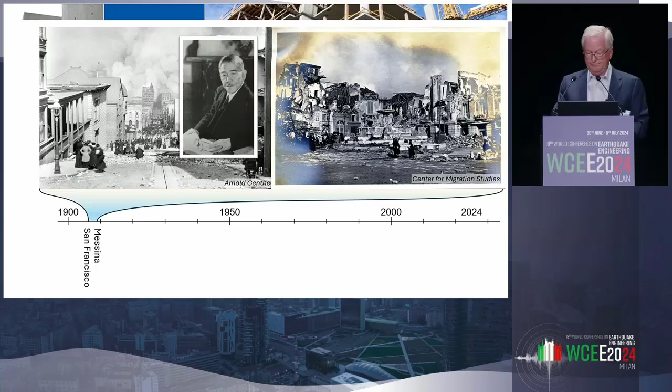It's practical, it's empirical, it's consistent with observations. That's how we do earthquake engineering today. The idea of designing for forces was very familiar. The idea of having load combinations that you could combine with other load effects was easy. And the fact that it was inconsistent with the idea that earthquakes don't apply forces, they shake the base of a building, that inconsistency could be overlooked given the practicality of the overall method. And so it was, largely, for many, many years.

Now, there were rapid advancements in the next quarter century. I point out a couple individuals from Caltech: a dapper-looking 26-year-old Professor Biot, and a little bit older George Housner, who did seminal work on development of the response spectrum method. Given recordings from earthquakes that occurred in the 1930s and the 1940s that were measured in the United States, it became quite clear that the idea of a base acceleration times the weight of the structure wasn't really the truth about dynamic response, that there was in fact amplification that occurred in various period ranges.

This set out decades of research and study, and quite frankly, a lot of arm waving about what exactly is going on in earthquake response. We can design structures for 1/10 of their weight, and yet they perform under rather intense motions where there's amplified response because of the response amplification we know from early work. What's going on? We see results of this: notions of overstrength, notions of nonlinear response. The idea of ductility comes into the language of earthquake-resistant design.

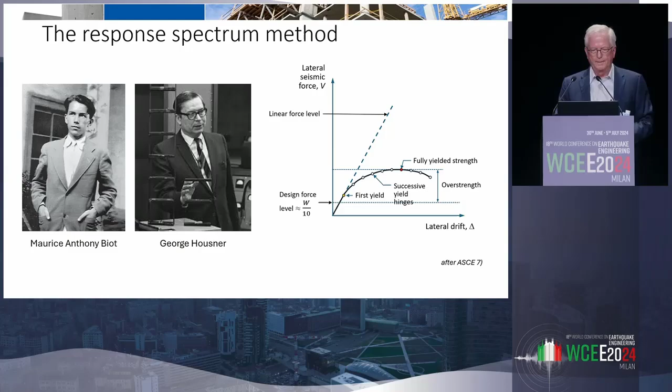We see that everywhere in our research and literature today, going back nearly 100 years now. Bringing this forward to today, at a World Conference on Earthquake Engineering, we started these conferences in 1956. The First World Conference was held at Berkeley, and there has been a conference every 4 years since. Throughout that period, this notion that the base shear could be around 1/10 of the weight of a structure for success has persevered as perhaps one of the longest lasting, most persistent ideas in earthquake engineering. But less and less so as we learn more about the subject.

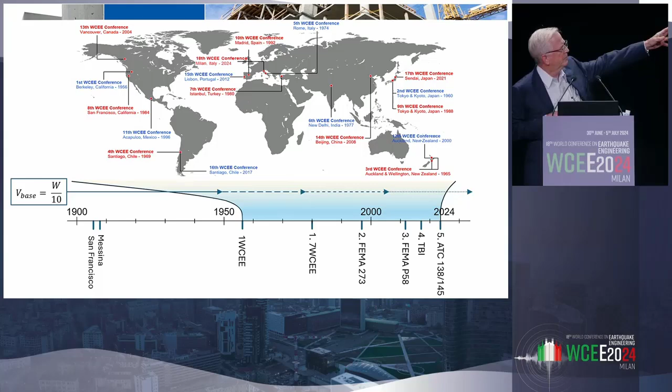Now, some interesting coincidences: 1956 was the year I was born, and the first earthquake conference happened to be in Berkeley. I wasn't there then, but among the 5 easy pieces I want to talk about, the first occurs in 1980, the year I arrived at UC Berkeley, during the 7th World Conference on Earthquake Engineering. The other 5 pieces are listed here with brief titles so I can identify the activities going on related to those things. In that 5-decade period, there are these 5 pieces I want to talk about.

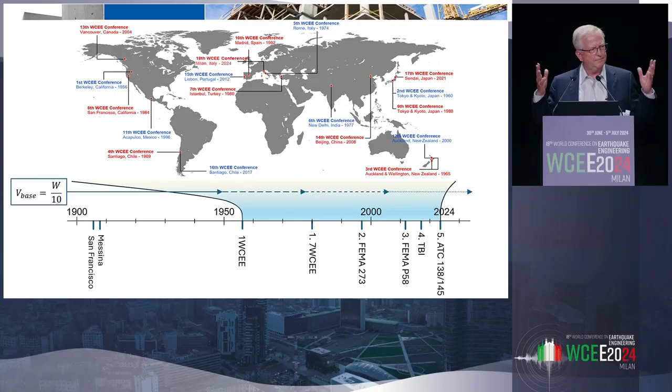Let's start on the first one. The first piece I want to talk about is displacement-based design. The paper was presented by Mete Sozen at the 7th World Conference on Earthquake Engineering, 1980. You can see a picture of the first sheet of that paper. It was titled 'Review of Earthquake Response of Reinforced Concrete Buildings with a View to Displacement Control,' or drift control, actually, as he wrote.

Pictured on the right is a photograph of a test structure on a shaking table. Professor Sozen is the handsome fellow in the middle. The fellow just to his right is the scruffy person - that's me as a graduate student. We were standing on the shaking table for a publicity purpose, to get a photograph showing what it was we were testing, what we were doing. That test model was being pulled toward the right by a cable up at the top.

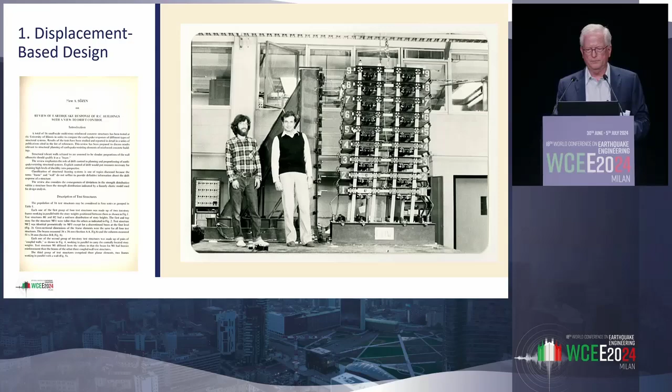We were looking at the static response of the system under rather large forces. Eventually, one of these versions collapsed onto the table - they were different times, we were a little less concerned about risk on these tables. The shaking table was 12 feet square, or a little over 3 meters square. It moved only in one horizontal direction. It was very limited, but it became the workhorse for Professor Sozen and the way he started thinking about displacement-based design.

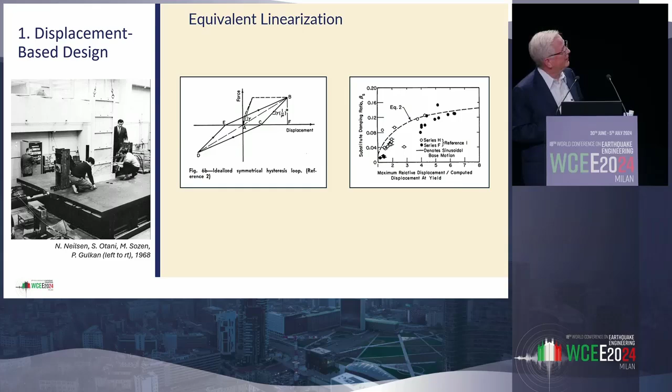Eventually, they flipped the method around. They started thinking about this in a somewhat different way. And this came out in a paper in 1973 at a workshop held by the National Science Foundation. In this paper, Sozen writes about a different approach to the earthquake-resistant design of reinforced concrete structures.

In this paper, he flips the idea. Rather than using the structure and the equivalent linearized properties to estimate demand, he says, let's flip this. Let's first assume there's a tolerable displacement expressed as a multiple of the yield displacement, and you pick that displacement based on how much damage you think is acceptable. So you start with the idea that you want to control the damage, you pick the displacement.

Determine a reduced stiffness of the frame, step 2, find a period, find an equivalent or substitute damping based on what was shown in the previous slide that Gulkan had been working on, enter a linear response spectrum with the period and the damping, and get a base shear out of it. And he tried various schemes of this type.

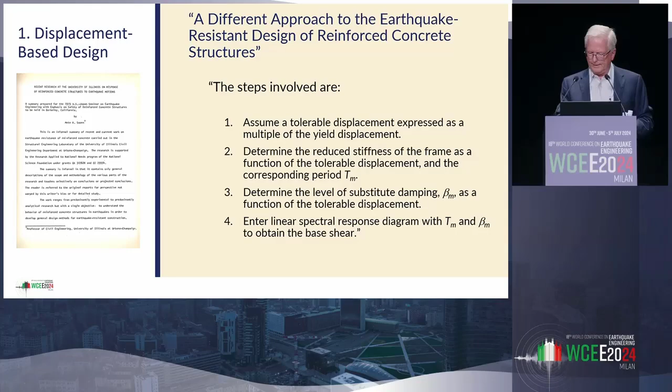This eventually came out, being published as work that Professor Gulkan and Sozen had in papers in ACI Structural Journal. It entered into the thinking about a substitute structure design method. In effect, this is really the direct displacement design method. Not quite the same as it might be done today, but the idea of starting with the tolerable damage and working backwards to figure out what the structure should be was a huge insight, a very different way of thinking about this problem at the time. I think it has to be attributed almost entirely to Sozen.

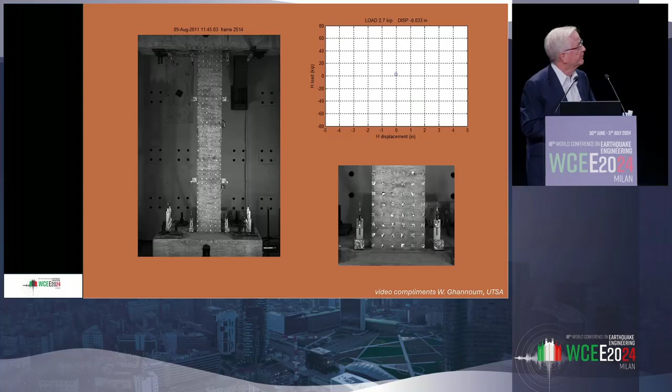Now, why was Sozen interested in displacement as opposed to forces? What we had before was, well, you get a base shear, 1/10, 1/12 of the weight of the structure, or something more complicated than that. Sozen's interest really came out of his experience in earthquake reconnaissance, looking at damage, and his experience in the laboratory looking at how damage develops in structures as they're moved.

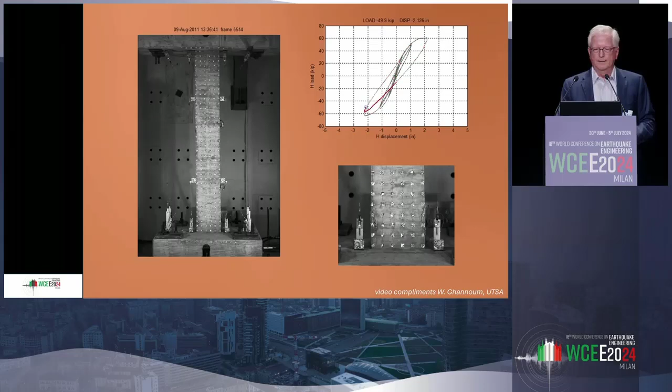And watch this video if I can get it to run. There it goes. So this is a column subjected to axial force and cyclic lateral loading, effectively linear at this point, cracking, beginning to yield soon. There we go. We'll let this run a moment more. Much more extensive yielding. The force resistance of this structure, or this simple column, is determined by the longitudinal reinforcement.

The longitudinal reinforcement in the column establishes the moment strength. Provided the structure doesn't fail in shear or bond or anchorage, and provided it's pushed into the nonlinear range, the shear force that it's going to develop is determined by the moment capacity. And there it is. And it's not that shear force that fails the column.

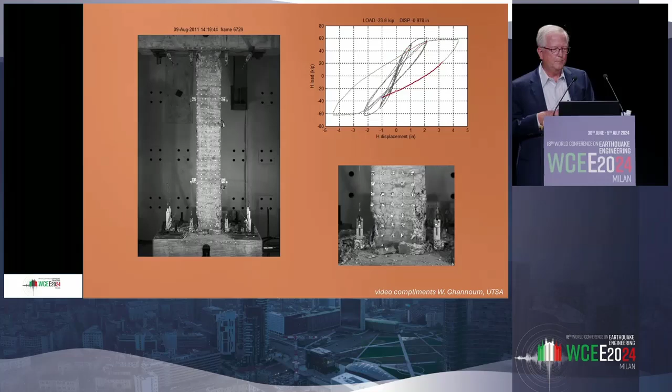What fails the column is the deformation and the repetition of large displacement cycles that cause damage and that eventually lead to the failure. And Sozen's interest initially was primarily in the structure, I believe, and trying to establish how to control displacement, to control structural damage.

He was also, though, interested later on in the non-structural parts. How do you control non-structural damage by controlling displacement? And it was a very different way of thinking about things at the time.

Now, I don't want to get into detail on the subject, but drift and displacement have been a subject of our codes and our guidelines for many, many years. Sozen sometimes liked to point to this edition or earlier editions of the Structural Engineers Association of California's Blue Book. And there was an appendix there by a drift committee that had written its report in 1959.

And the drift committee, if I can find my notes here, said that safety, of course, was important when considering drift. So if you had elements that would get knocked out of place and fall on people and kill them, those had to be addressed. But beyond that, non-structural items and discomfort of occupants were not to be part of a building code because they demonstrated excessive paternalism.

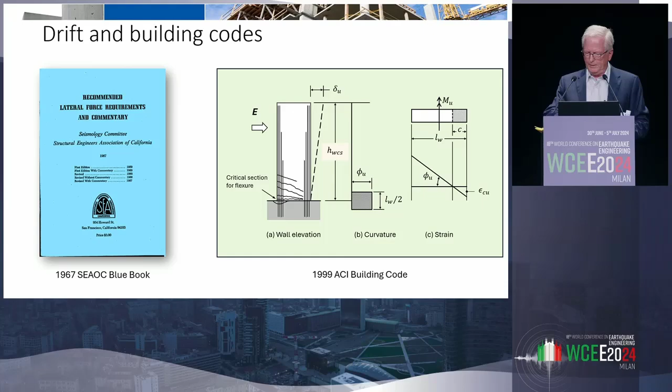I want to close on this first piece, and I could spend all day on it, and I might if I don't stop now. But Sozen had a big team of students over many years, and I credit that team as shifting the focus from forces into displacements as a preferred means of identifying damage and design requirements.

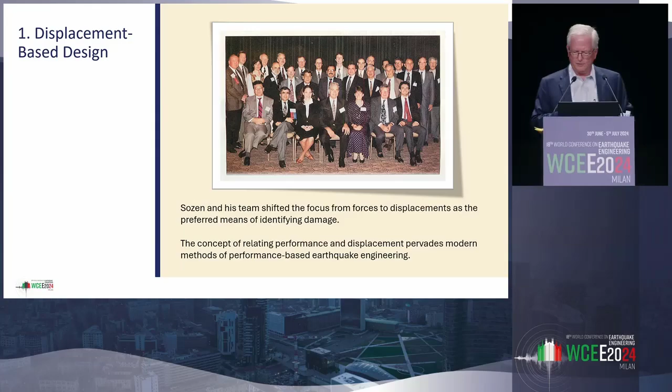And the concept of relating performance and displacement, and the notion of picking the displacement as a way of deciding if a design is good or not, or what needs to be done with it, today pervades methods of performance-based earthquake engineering. And while Mete Sozen tended to disparage the notion of performance-based engineering every time I spoke with him, he really, I think, got the start of performance-based engineering, gets the credit in my book of getting us moving there. So that sets the stage that I wanted to start with.

The second thing I wanted to say about performance-based earthquake engineering, the second of the 5 easy pieces, is one related to existing buildings and the assessment of those buildings.

I wanted to point out first that in California, in the period of 1971 to 1994, there were many damaging earthquakes. There was a lot of shaking going on in California at that time. And those of you who are from California and young, get ready. It'll start up again sometime soon.

Be prepared. But this was a very active period. We learned from those earthquakes that most modern buildings perform reasonably well. They did what they were expected to do. They were pretty safe. But many of them sustained damage that was not adequately controlled, mainly in non-structural systems. So that was a consideration that needed more attention.

The existing building stock, on the other hand, was another story. And there was a lot of damage that occurred in existing buildings at the time. Owners began to be more aware of the problem of existing buildings. Many owners contacted engineers to look at buildings and start thinking about strengthening them. The word was strengthening at the time.

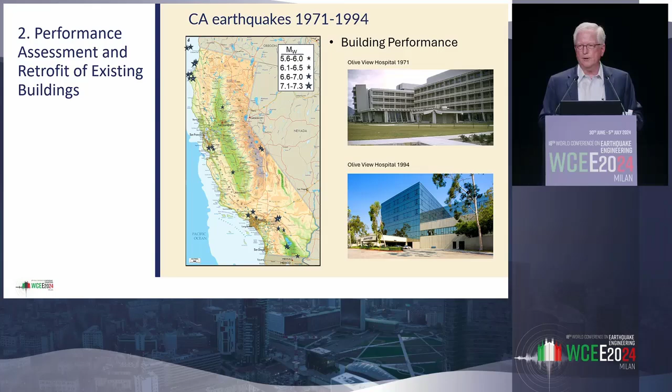And when they got into the business of negotiating fees on these things and the cost of construction, they started asking questions, well, exactly what am I getting for the money I'm going to put forward for this building? What kind of performance should I expect? And engineers were making up answers, in my opinion, doing their best job, but there was no standard to really judge this by. And performance-based earthquake engineering, I think, in California grew out of this many earthquakes and the need to answer the question, what kind of performance will I get if I retrofit a building and design for a higher performance level?

Given the work that Sozen had been doing and others, there was awareness in the structural engineering community on the west coast of the US that displacement mattered. The original idea of seismic strengthening was that if the strength was less than about three-quarters of what the modern building code required, you added more strength to get it up to that minimum level. The thinking was beginning to change around the early 1990s into thinking about displacement-based ways of controlling damage.

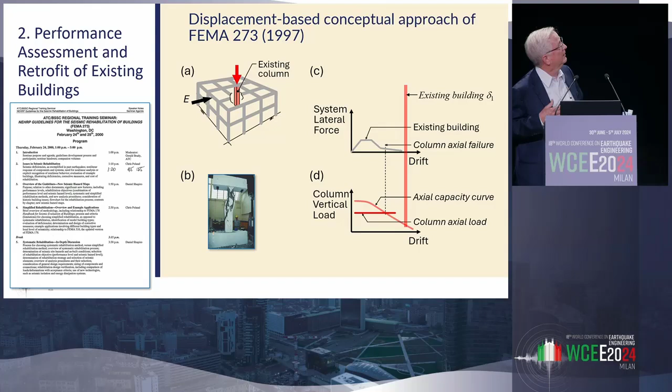Now, if you start with a simple frame like the one illustrated in A, and you've got this red-orange column in the middle that's vulnerable, one way to fix the structure if it's inadequate is you can jacket the column or replace it. If you want to change the structural system to protect that column, the old thinking was you strengthen the building. The new thinking was that you had to control the displacements in the building.

This little set of cartoons came from some seminars used to train practicing engineers on the new methods being developed, on guidelines for seismic retrofitting, which came a couple years later. But this is, I think, a useful slide for illustrating the concept.

We've got that vulnerable column. The lateral force resisting system is weak. It doesn't provide enough resistance to control displacements. In D, the column may be pushed beyond its shear capacity, or beyond a capacity where it can continue to support vertical loads. The key to retrofitting in providing a supplementary system is to bring the drift back.

And this seems routine today, but in 1991 or '92, this was not routine. This was not the usual way of thinking about retrofitting and repairing, rehabilitating buildings.

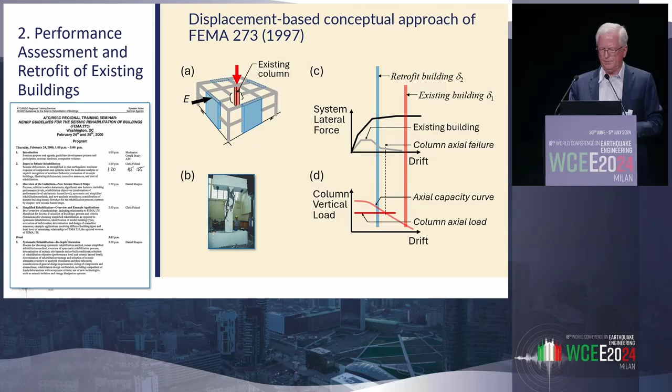FEMA, the Federal Emergency Management Agency, recognized the issues of existing buildings, and it started a program in the 1980s that really kicked off with the development of a document, FEMA 273, with a set of guidelines for the seismic retrofitting of existing buildings.

Here are some of the key team members involved in the project. Many of them I think of as real masters of earthquake engineering who deserve to be invited soon to this stage. Ron Hamburger, in one of the presentations early on in the project, presented this slide during a presentation at an East Coast university. This slide became really the poster child, in a sense, for the project, and it shows a number of interesting things.

One was the notion that there would be multiple performance objectives that one could choose. One could choose something related to a 25-year shaking level and a different performance level versus a 2,500-year return period, for which you might consider being on the verge of collapse. So this idea of performance objectives with both demand and performance level both considered was kind of new.

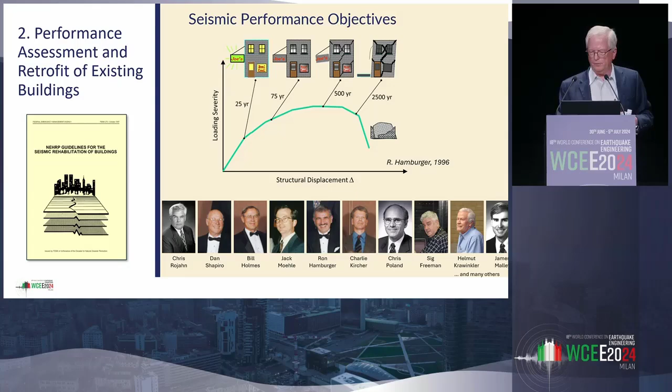The response is definitely non-linear, which was fairly new at the time. And the idea of being very visual in the presentation of these different objectives, so that you could explain to those property owners who wanted to know what they were getting when they asked the question — what am I getting for the amount of retrofitting you're proposing to give to me? It was very important to have all those things.

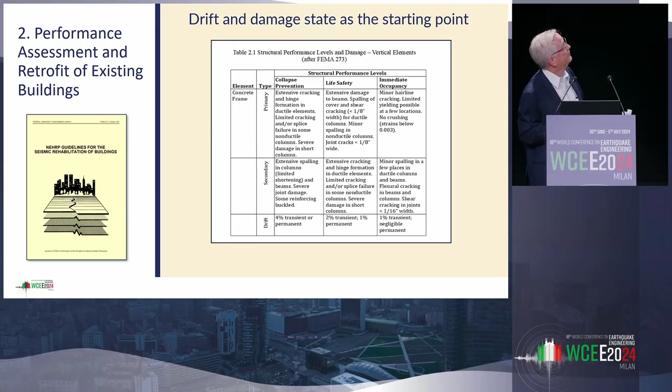I think for the first time, this committee went to work on trying to define what each of those limit states really was about. Shown here is part of one of the tables from the FEMA 273 document. For concrete frames, if they're a primary part of the lateral force resisting system — meaning they're supposed to resist the earthquake shaking primarily — for collapse prevention, life safety, et cetera, this is what that team decided was the right set of performance levels and how to describe them.

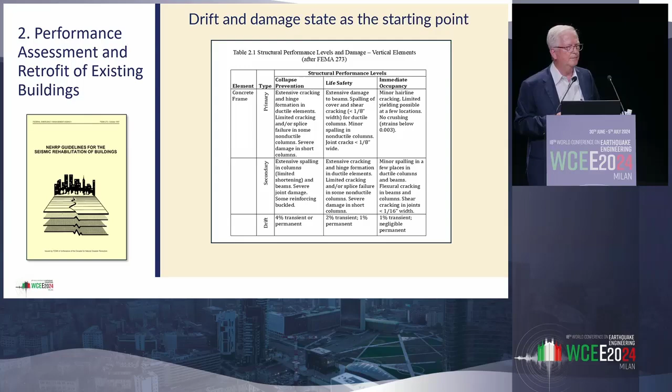Once the levels were described, the team had to go about the business of selecting ways of delivering a building that would do that. So there was discussion and provisions developed related to global modeling, how to do a global model. And for the first time in US practice at least, there was very explicit consideration not only of linear modeling, but non-linear modeling and analysis methods, both static and dynamic.

For each component type, there had to be models developed and described. You had to understand what were the deformation limits and the criteria that were needed. And then for each one of those components, criteria were needed to help define whether they were force controlled — in other words, unable to yield without failure — or deformation controlled, meaning they had the capacity to deform non-linearly without failing. For those different kinds of components, criteria were needed for strength, for stiffness, and something totally new for the time: how to define the deformation capacity of a component that's yielding. Totally new thing.

Not that we didn't know it was needed, but we didn't ever have criteria for that. I want to pause for a moment and reflect on the fact that this had a huge impact on practice, on research, and on computer software development. We needed software that could do this kind of work, and the software companies stepped up and delivered that.

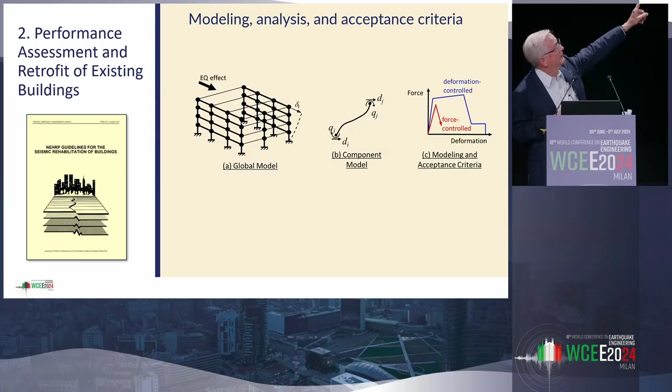We needed to understand criteria for deformation-controlled components, and we made a lot of them up at the time. But this provided a focus for research in the structural engineering community to do more tests where data were not available, and to create databases of test results from which to derive criteria for strength, deformation capacity, and so forth. It opened the door because engineers had to use these procedures. New results came, software came, research, and practicing engineers started doing nonlinear analysis for the first time on a somewhat routine basis, and it changed the way practice developed from that point forward in California.

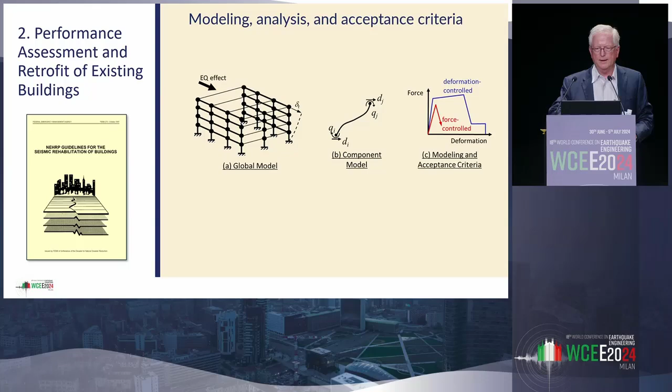These procedures were very widely used. The Berkeley campus is one example of sort of a retrofitting museum, so to speak. But we can find structures all over the United States that have been retrofitted by these procedures, and we think they've been very effective. One thing I didn't mention is that while we had performance objectives, they were really notional in the sense that we could state a life safety criterion, but we didn't actually calculate a risk of not achieving that criterion. That was just too much to do at the time, and more time and more research was needed to take that next step.

And that gets me to my third piece in the 5 easy pieces. So right about the end of the development of FEMA 273, it was apparent that we needed risk-based procedures. We know that there's uncertainty in earthquake ground motion, in structural response, in the occurrence of damage, in the amount of time it takes to fix damage, and so forth. But it was a huge undertaking to figure out how to do that.

We adopted Ron Hamburger's cartoon, updated the structure a little bit so we could call it our own in the Pacific Earthquake Engineering Research Center. Bill Holmes from Rutherford and Chekene came to one of our research meetings and gave a presentation and told us we needed a performance engine that would be able to calculate not just serviceability states and life safety states and so forth, but would be able to tell us the cost for repair, the casualty rates, and the downtime. We had no idea how to do it in the Earthquake Center, but we had really good people to work with.

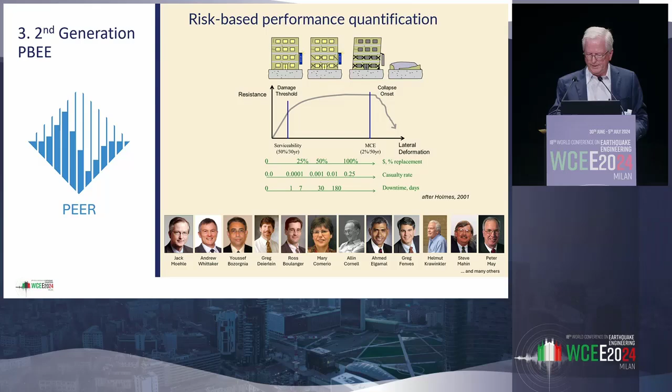For example, Helmut Krawinkler and Allin Cornell from Stanford University took on the task of trying to figure out how to formulate this notion of performance, how to actually do a calculation that put all the uncertainties together mathematically and enabled us to do a calculation of what was the risk of repair, of cost, et cetera. The way the equation worked, just in the boxes: given a facility and a location, do a hazard analysis, do a structural analysis, damage analysis, loss analysis, and then come out with some variables about cost and time and activities required to restore it.

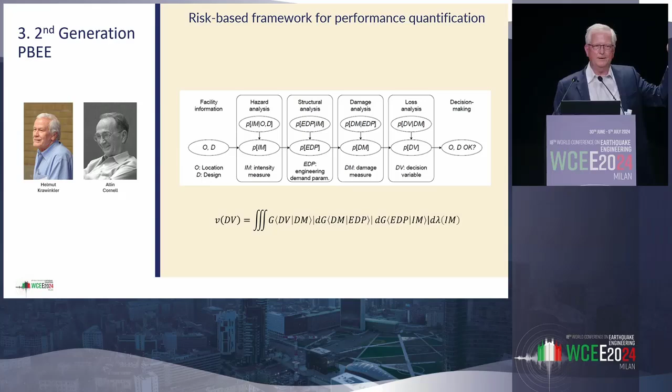Easy in the boxes. Even easier if you just write down a triple integral. This triple integral essentially incorporates the ideas in the flow chart above. Many practicing engineers looked at this and said, 'You've got to be kidding. No way are we going to do anything like that. You academics are nuts.' Peter May, who was a social scientist, looked at the equation and said, 'You're oversimplifying the problem.' And Peter was right. Solving the equation isn't easy, but we figured out ways to do it.

One of the ways it was solved was done in a little project with Tony Yang—I think Tony is here somewhere in the audience. We were working on trying to figure out a practical way to do the integrations and essentially set up a Monte Carlo scheme. The idea was that given a facility, you did a hazard analysis, you selected some ground motions to represent the hazard, you input them into the structural model, calculated engineering demand parameters like drift and acceleration. You determined damage from that using a fragility relationship—how does damage of an infill, for example, relate to story drift?

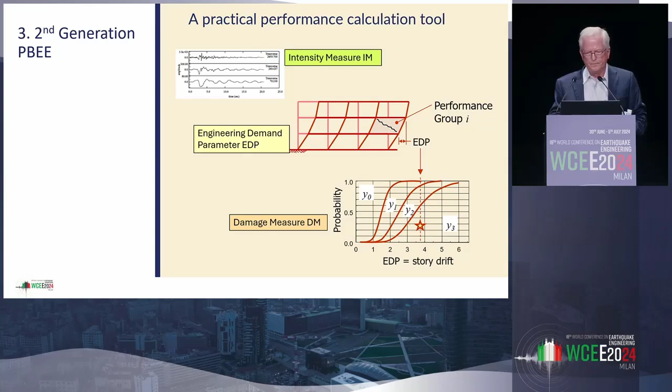You would then do this in a Monte Carlo study thousands of times so that you could characterize the distributions of the results. But there was no way you could do it, because just the nonlinear analysis at the time, and still today, takes too much computational time, and dealing with the results is just too difficult. So what we schemed was a technique where we did it a finite, smaller number of times, and collected all the engineering demand parameters that were of interest. In this example, we did a 3-story building.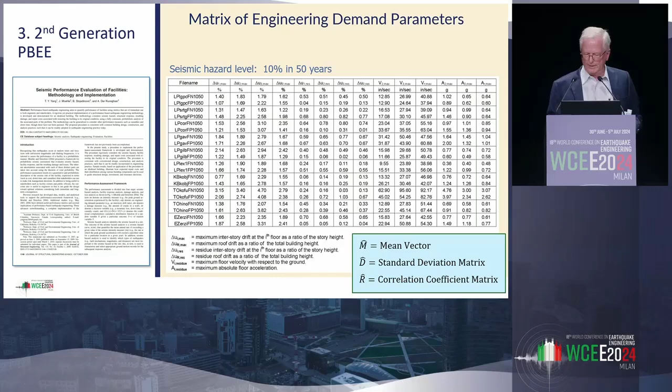We were interested in running 11 ground motions at each of several hazard levels. From that we collected displacements, accelerations, and base shears, then looked at that matrix to figure out the mean vector for each demand parameter, the standard deviation for each one, and what the correlation coefficient matrix looked like. So we could mathematically derive, through an inverse process, a series of demands that was statistically consistent with the results from the nonlinear dynamic analysis, allowing us to simulate mathematically the results from nonlinear response history analyses. Here's a sampling of 10 sample realizations using a process like this.

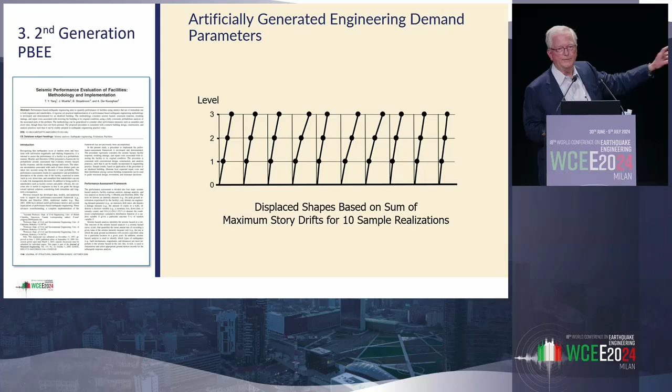The nonlinear analysis could take an hour per run. This took a fraction of a second to do 100 of them. So with something like this, we could develop realizations of what the earthquake demands were, and given those realizations, we could do damage calculations, loss calculations, etc., in a probabilistic way, taking all the uncertainties into account, and do it fast.

In this process, we could calculate the probability of certain repair costs given an input motion. So here are essentially fragility curves for cost. We could integrate those and get an annual rate of exceeding a total repair cost, and take an area underneath that to get a mean cumulative annual total repair cost for a building. Or you could look statistically at how individual components of the building were doing, find out which components were being more heavily damaged than others, and try to find ways of changing the structure or clearances to reduce the losses causing most of the cost. It was a fascinating exercise, fun to develop and get it to actually work.

This procedure was being developed by the Earthquake Center at the same time FEMA was involved in another project, the FEMA P58 project, which aimed to develop the data necessary to determine what the losses were for a building of any general type, with multiple building types being considered at the time. So there was a big team that worked on this, marvelous people to work with.

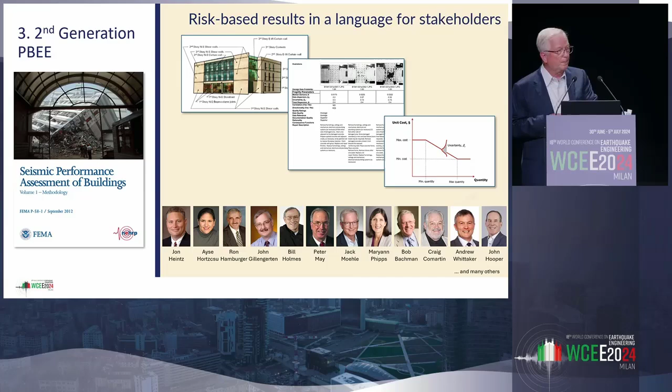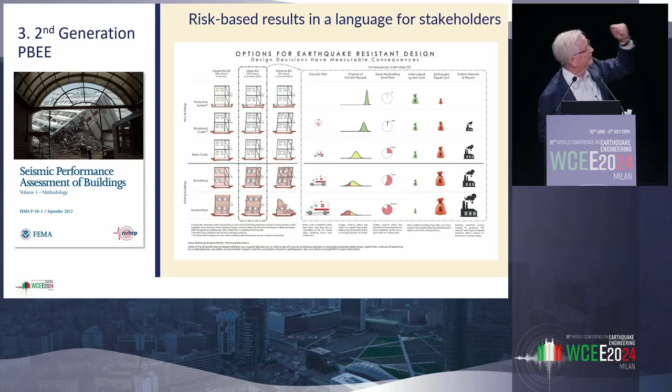When the information was all assembled with this performance calculation engine that we built at Bill Holmes's suggestion, you could put together almost anything on performance output. David Marr, who I saw earlier yesterday, maybe in the audience, came up with this graphic for the FEMA P58 project. The idea, on the vertical left axis, was having different design bases determine, as you move across, different casualty rates you might expect. It might influence downtime differently, the probabilities of getting a red, yellow, or green tag on your building, cost for repair, and downtime costs.

As we were getting toward the end of the project, FEMA said you've got to include environmental costs as well. Once you've got the engine and start inputting the data, creating fragility relations for everything you need, this becomes kind of routine. This was really, in my view, the third big piece in performance-based earthquake engineering: being able to quantify the risk of being in different damage levels.

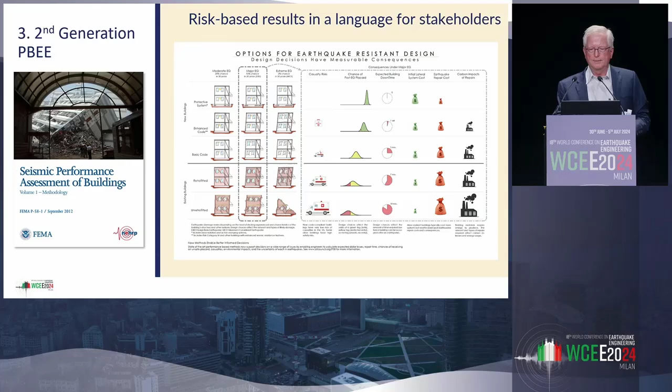Now, once we had things like this, we started working on the problem of designing tall buildings. There were many other types of buildings that could have been pursued, but there was particular interest in California and throughout the West Coast at the time in pursuing taller buildings that were a little different from buildings designed before. They were outside the requirements and restrictions of the code, so something different was needed.

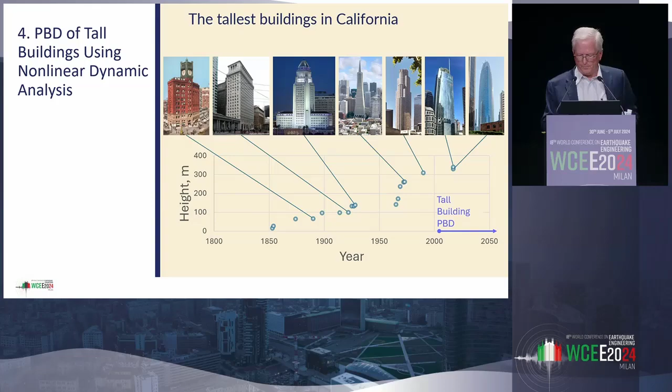Here is a plot of the tallest building in any given year in California up until about 2015. As we start getting into around the year 2000 to 2006, there was a bigger push coming along to design these buildings outside the prescription of the building code, and we had the tool to do it — this performance-based tool. The new building generation had different kinds of framing systems, odd geometries and cladding, and combinations of structural systems within the building that just didn't match anything within the building code.

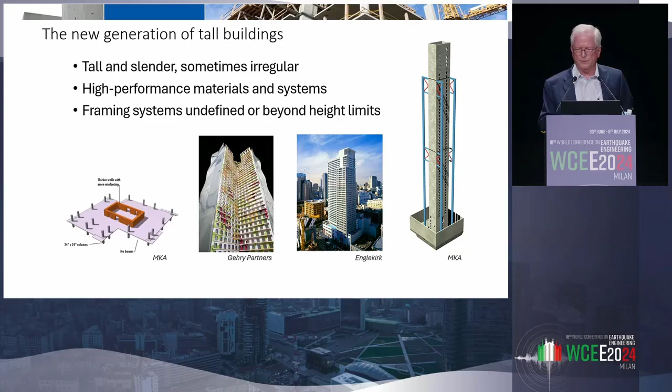So we needed a performance-based approach. Lots of studies were done to try and figure out how to do this. Time doesn't permit going into many of them, but one study involved sample designs by practicing engineers of different structural systems, designed by different methods to see what the output was. This example looks at a 42-story tall reinforced concrete dual system compared with a 42-story reinforced concrete core-only system. If you designed a core-only system in California at the time, you could only go up to about 15 stories or so.

This goes way beyond that, and requires design by a performance-based method. These were designed by two different design concepts: the code as it existed at the time, and a concept we had, a notion of a design guideline that would allow us to carry out the design outside the code. Quick to the results.

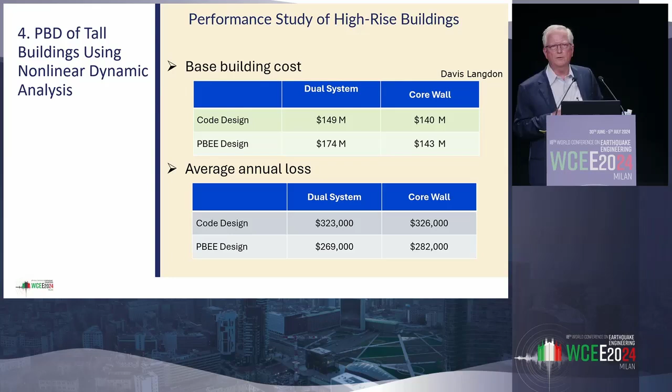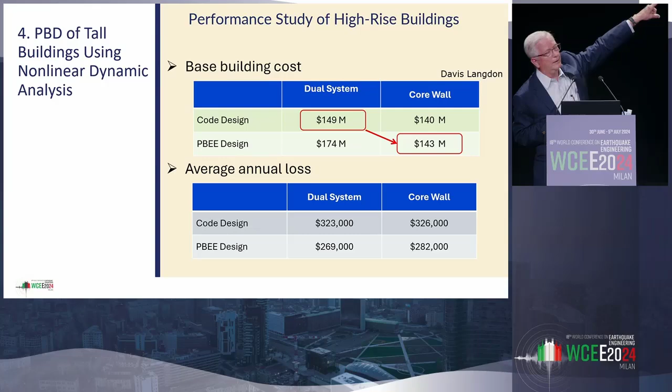These two systems were designed two different ways. There's the initial cost in accordance with a real cost estimator, and below that a calculation with this performance tool of what the losses were for each of these buildings. If we were designing only by the code-required system, we would have the dual system code design at $149 million US at the time. If we could shift to the performance-based design, we could go to a core wall, and it would be a little bit less expensive. But it was something we could design. It wasn't more expensive, and it had other attributes in terms of functionality that developers were interested in.

In terms of average losses, comparing the two: it's $323,000 calculated for the dual system by the code prescriptive design, with less losses for the core wall system. A lot of this had to do with losses because of the drift demands on flat plates, but also the shear demands we calculated on the core wall system.

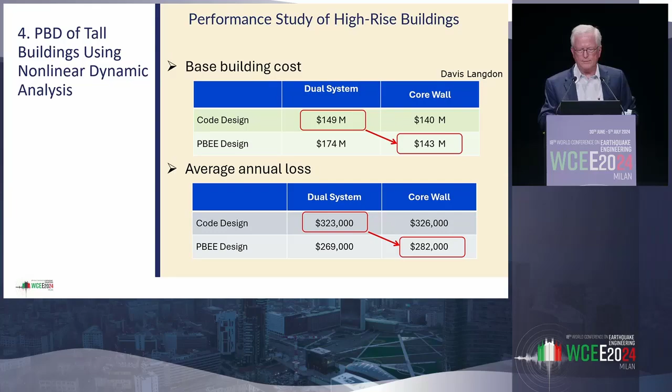With this in place, we started the process of writing a guideline that could be used by practicing engineers to implement this for the design of multiple buildings. I'm sorry Farzad, I had limited time tonight, so I can only talk about the tall buildings guideline, not the LA tall buildings guideline, but there's an equivalent, almost equivalent document in Southern California that gets used.

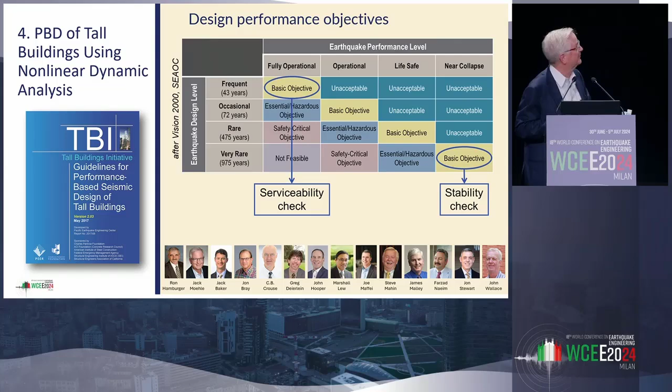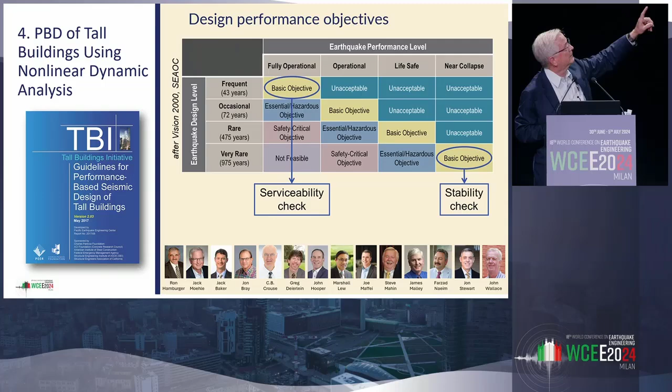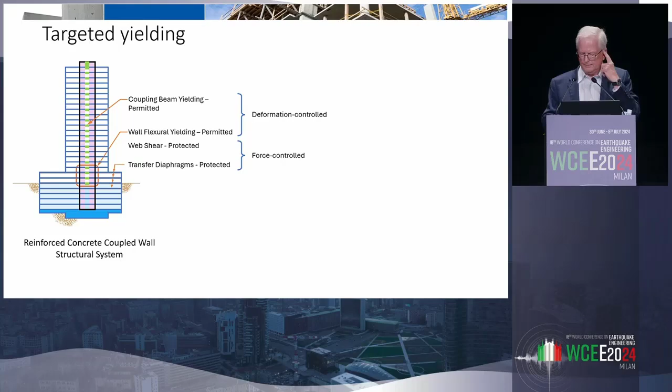It was decided pretty widely within the state that the best way to do the design was by picking a set of performance objectives: a serviceability check for frequent earthquakes and a stability check for a very rare shaking level. The design methods involved specifying targeted yielding locations and locations protected from yielding. The structure was to be analyzed in certain ways, with guidance provided on how to do the analysis and what had to be modeled.

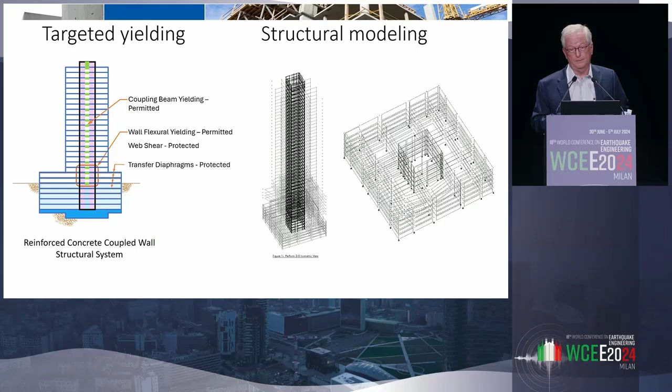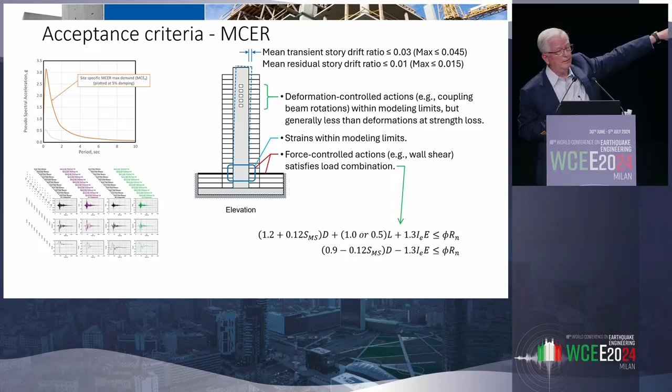Acceptance criteria were developed, and the criteria are a little different in the two documents I mentioned. What was typically done is run a series of earthquake ground motions through a model of the building, check drift ratios, deformations in certain deformation-controlled elements like coupling beams, check strain limits against your modeling ability, and for certain force-controlled elements, make sure the forces stayed below the force capacities. For those elements, there were load combinations developed that were intended to achieve the performance objectives stated in our building code.

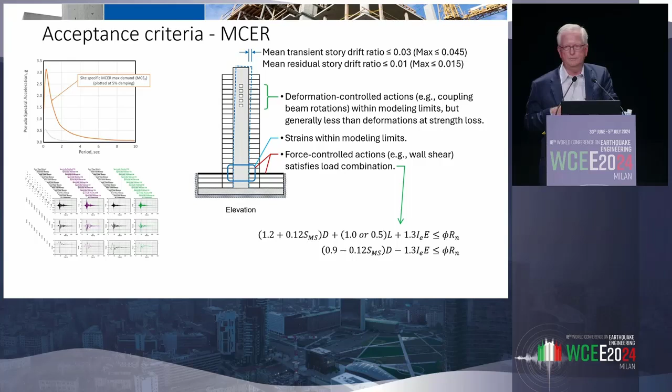10% or less probability of collapse in a maximum considered earthquake condition. The building code and materials code stepped up and developed resistance and strength reduction factors to fill in on the right side of these equations.

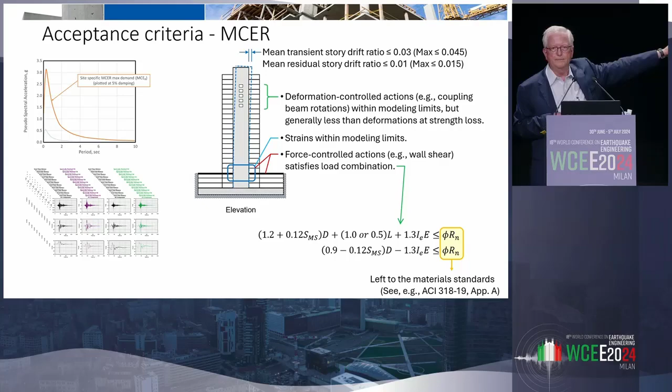These methods were used in many buildings up and down the west coast of the United States. I served on several peer review panels and started collecting data quietly on how each of these was performing, at least according to calculations under nonlinear dynamic analysis. Story drift under service level earthquakes was pretty small for the most part. Under maximum considered earthquake, the maximum of the mean drifts never got above 3%—pretty high, though. Residual story drifts were generally pretty low because they're core walls.

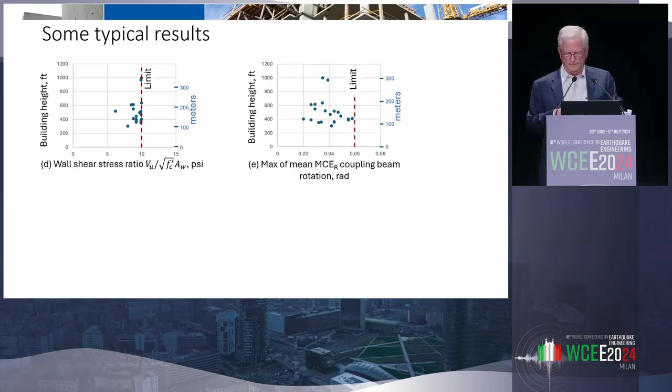Shears on the walls are the item that oftentimes control the design of these buildings. They get pushed up toward what we had established as a shear limit at the time. And then the rotation of the coupling beams oftentimes can be a controlling factor because the beams are constrained within the rotating walls. John Wallace, who's here, provided some test results from UCLA based on Pankow Foundation testing to show what these things would look like given that level of shaking.

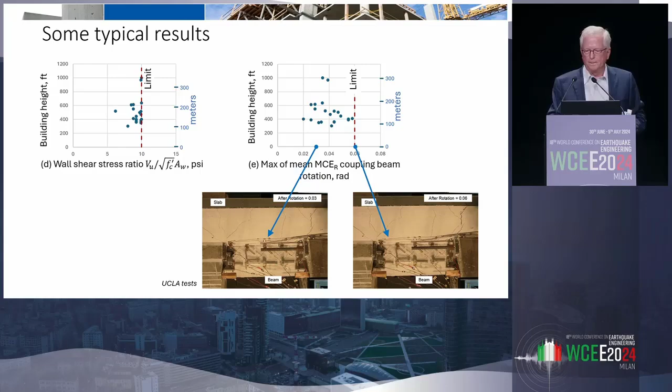And it was reasonable, at least within performance states that was considered non-collapse. We generally felt good about this process because we were providing a means to design buildings in a way that was considered effective, efficient, met performance objectives, and provided reasonable assurance for the occupants of these buildings that they could work and live and play in their urban centers.

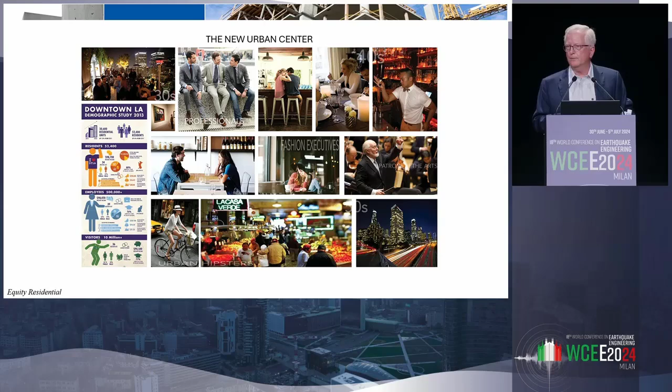But one thing we really never checked for these buildings was whether their performance really met the societal expectations. And I think it's an area that we need to do some work, and it's my last piece, what I want to chat about.

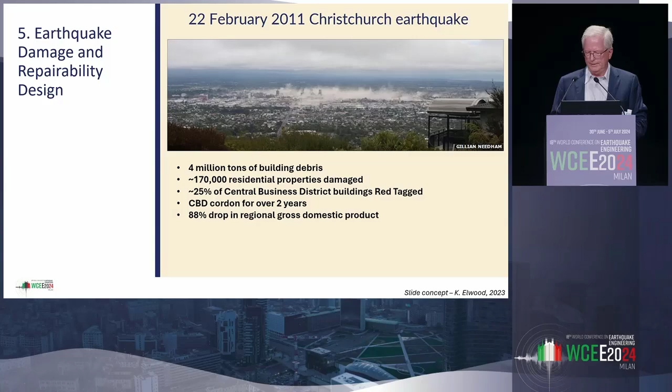This idea that buildings should be repairable, that communities should be functional, I think is the next step and the ongoing step in performance-based earthquake engineering. And I want to spend just a few minutes on this.

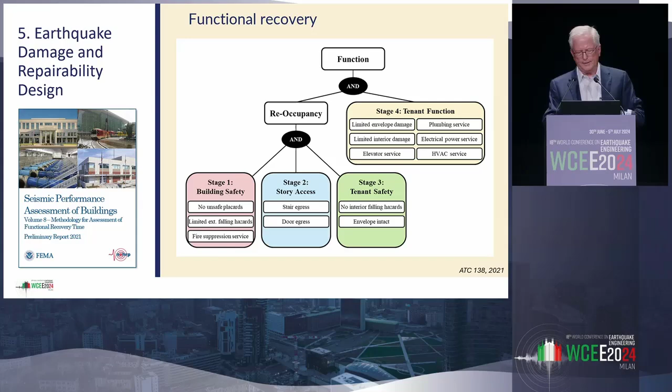There is a project, another ATC project funded by FEMA, addressing this notion of functional recovery for our communities. And there is a flow chart that identifies multiple stages. In the interest of time, I'll just focus on building safety. But there's other aspects of functional recovery as part of this focus.

On the building safety, one needs to be sure that a structure is at a point where it's safe to occupy. It doesn't have what we would call a safety critical damage state that would make the building suspect for being unable to perform again in an earthquake.

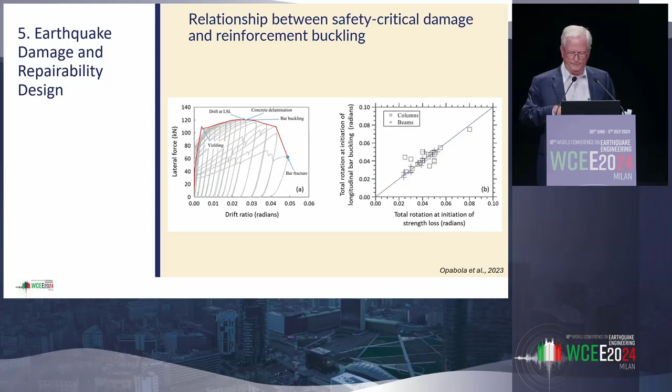We found this fairly consistently for columns, beams, and structural walls, and some of the data are shown there, not all. We've also looked at some results, for example, results from Kawashima and Koyama, that in this case look at identical test columns subjected to different numbers of cycles. As we get up to 4 delta Y, there's no strength loss, whether there's 3 or 10 cycles up to then doesn't seem to matter. But once you get past the point where strength loss occurs, the amount of cycling matters and the strength decay accelerates, and the appearance of the damage is notably different.

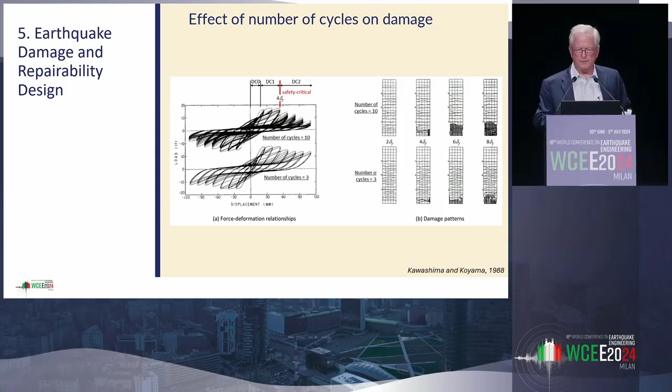But prior to that point where safety critical damage occurs, things seem fairly stable. Not only does a structure need to have component response that's very stable, but the dynamics of the building has to be stable as well.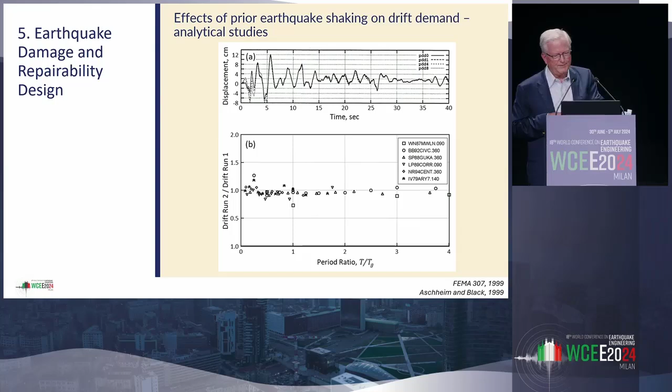There have been studies - in the interest of time I'll skip one, work by Aschheim and Black that was very interesting - but other studies done by the ATC 145 team and some of the students working on that project were to collect data from shaking table experiments. These data look at shaking table experiments of reinforced concrete ductile systems subjected to two earthquake runs, and sometimes even runs in between those two earthquake runs. They include single-story to 10-story, moderate-scale structures to full-scale structures on the E-Defense system in Japan.

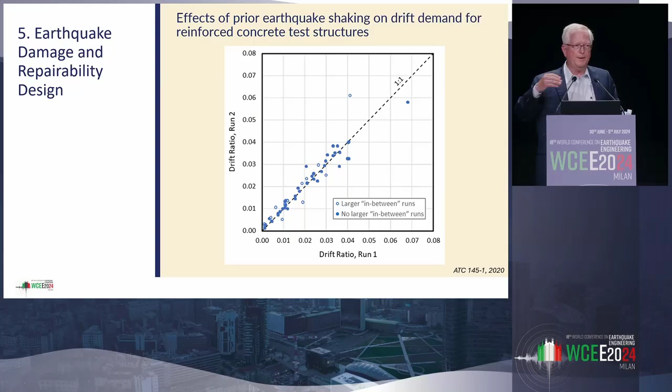Notably, the repeatability of the structure response - the ratio between the drift in a second run divided by the drift in the first run - is remarkably consistent, provided you don't push the building past a certain drift level and past a point where safety-critical damage occurs.

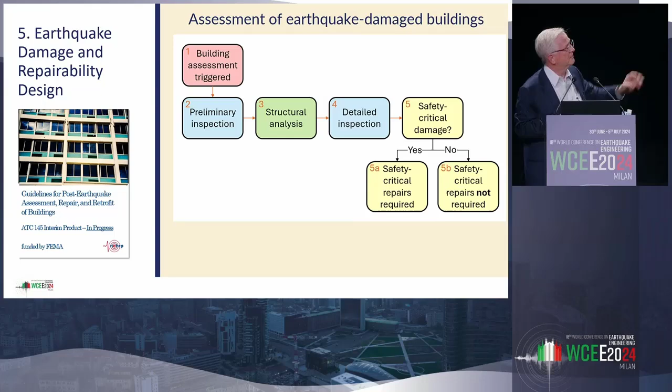This idea is built into a draft methodology for doing inspection on a building. I'll avoid the details of that. But it's also been suggested by Opabola and Elwood that this idea could be used as a way to do design of a building. The idea is you pick seismic hazard, do preliminary proportioning, do structural analysis, examine whether safety critical damage is likely based on that result. If yes, reproportion things. If not, go to structural detailing and document preparation.

Now, this is a very simple flow chart. You have to understand, of course, that there's a lot of uncertainty in all the things we deal with in earthquake engineering, and so there's a lot of complexity built into the process under the covers here that I'm not showing. But they've run some examples.

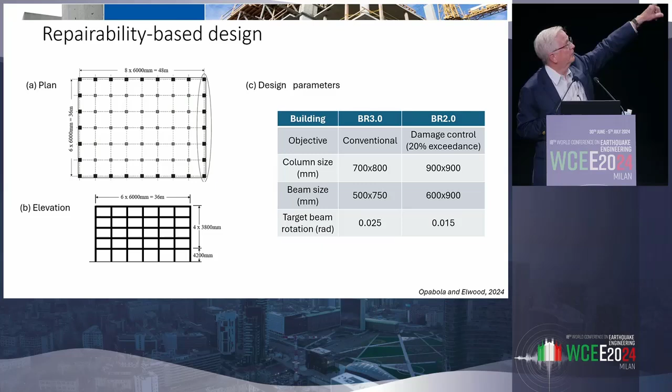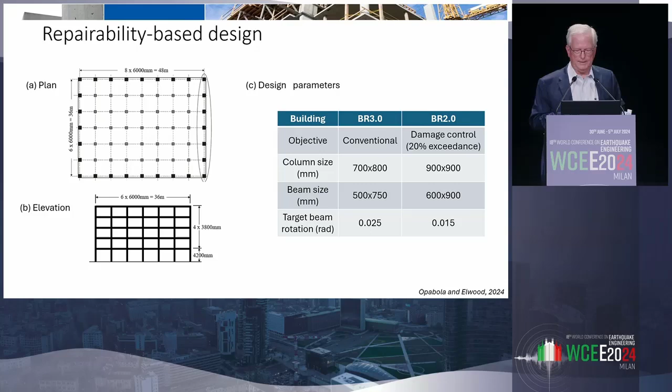Here I pull out just two examples from a paper they recently published in Earthquake Spectra. Some five-story reinforced concrete perimeter moment frames, a conventional design BR 3.0, and a damage control design BR 2.0. One designed by the New Zealand code, the 3.0, the second with some upsizing of components to meet acceptance criteria for beam rotation such that it's less likely to have safety critical damage.

And they've run through studies. On the left, the conventional design, developing a probability of exceedance of that safety critical limit of 26% under the 500-year return period of shaking. The damage control design, where they're targeting a 20% exceedance level, ended up with a 16% exceedance level. So they kind of exceeded what their target was.

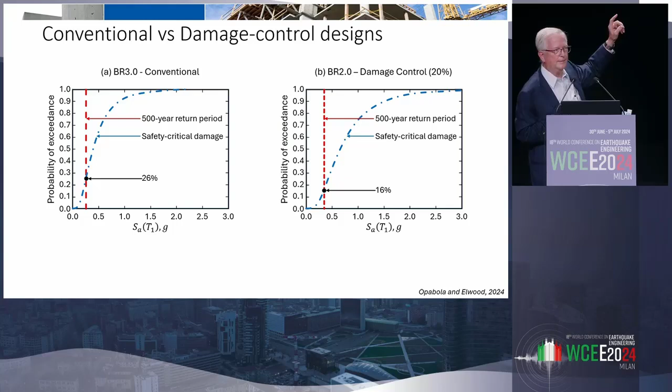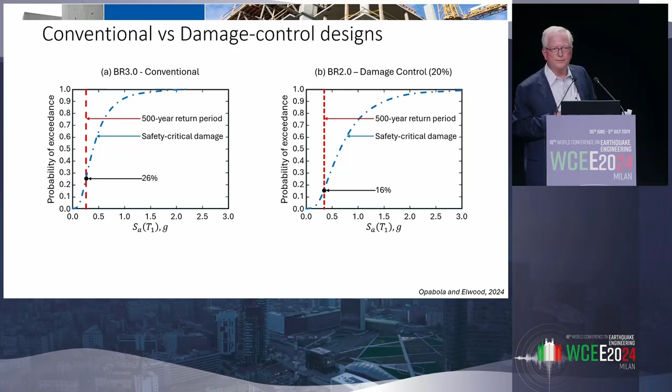It's interesting that one can theoretically control the resulting damage, and the method seems to work fairly well. It's a little disconcerting that if you wanted to get even higher safety and reliability than just 16%, you'd have to go to quite a more stout or a completely different structural system to get it to work.

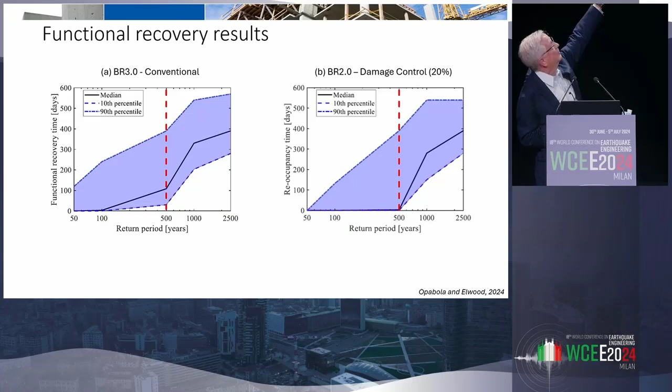They've also looked at some functional recovery results for the two different designs. In terms of functional recovery time under the 500-year return period shaking level, it's about 100 days for the conventional design they looked at, 0 days for the other. It's one example of one building archetype with two different sizing options. More study of this type is needed to understand how to design an individual building and how to approach the recovery of entire regions. Closing thoughts, and then I'll finish.

I presented this talk in sort of five high-level pieces of performance-based engineering. The first, I consider kind of the father of performance-based earthquake engineering, is the person who got us thinking about deformations and what damage is and how to focus on damage as a process—Professor Sozen. We talked about the idea that performance-based retrofit in the US was driven by societal needs at a time when we had many earthquakes, and how this really game-changing project developed nonlinear methods, focused the design method on displacement, came up with criteria, and again, was a game changer in the practice community.

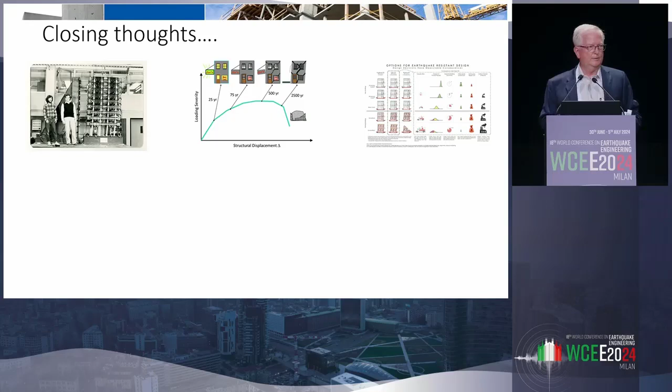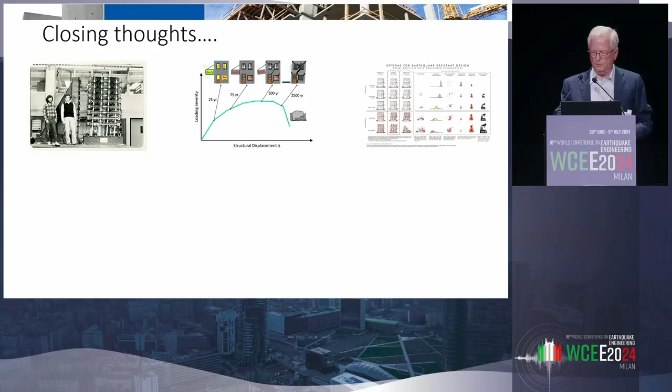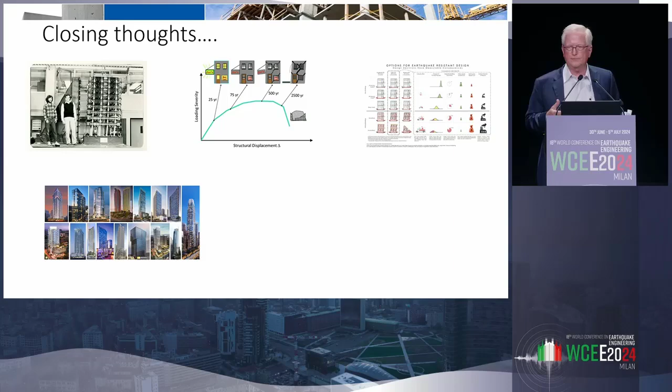The next set of projects developed a risk-based approach to this performance-based engineering, creating a performance tool that could be used to study various kinds of design methods, new materials, new configurations, new seismic environments—a very flexible tool that allowed us to make statements about the risk of damage and consequences. We, I think, have had an excellent experience using these ideas to step outside the prescriptive provisions of our building codes and successfully design a series of buildings that are taller and more efficient than buildings we designed before. And it's important for us to use materials efficiently and to be flexible in our approach to design.

We await the next earthquake as the demonstration that we're doing the right thing. And I think then the final step, piece number five, which I encourage many of our young people in the audience to really pursue if you're not already on this one—it's for the next generation for sure. But looking at functional recovery, repair, design for repair, and those kinds of topics. With that, I thank you for your attention. We've got a marvelous set of tools at hand with performance-based earthquake engineering, and I think the promise ahead is really very bright. Thank you.